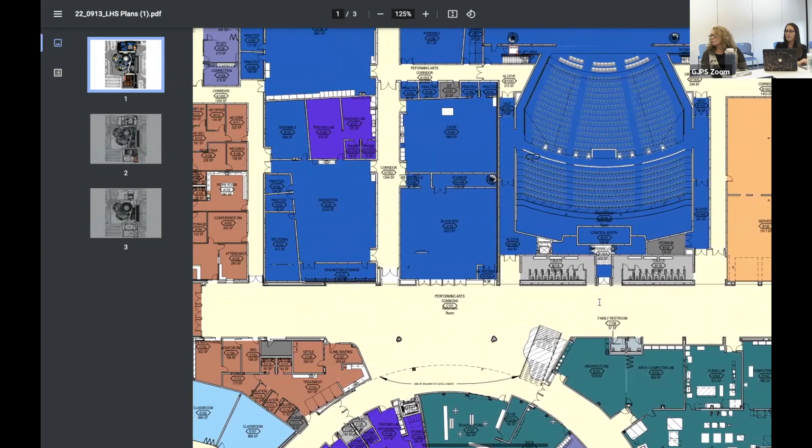As we move down here, this orange space is our main kitchen prep area with servery for meals. As we move farther south, this is the North Commons, which is also going to be one of the main pathways out to the stadium—so that will be a direct pathway out to the stadium for stadium events.

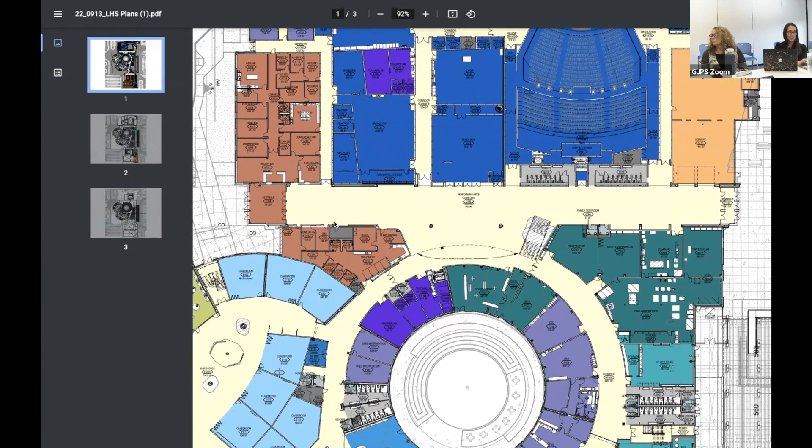This section here is where we have a nicer, much larger clinic area, as well as security offices for SROs and our camera area. So that will be a nice added feature for us.

Moving into the academic prides, I'll start over here. We have 3 floors, and the academic prides are essentially stacked, so what I explain for floor 1 is duplicated on floors 2 and 3, with the exception of a few spaces I'll point out.

You'll notice here in this North Pride, the green signals science classrooms, and the lighter blue are our gen ed or regular ed classroom spaces. We previously had a classroom here where my cursor is, on the back side.

This classroom here has been added - it's one of those third floor classrooms that we brought down and put into each pride. So we essentially have an extra classroom here and an extra one in the south pride, and those are duplicated as well on floors 2 and 3.

Let me go down here - same format, general ed classrooms, science classrooms. This blue color here is our media center.

One of the things we originally had in our plan was a 2-level media center. Right now, on the second floor, the media center has been shelled out space, so that's space we'll have to develop at a later time as needed.

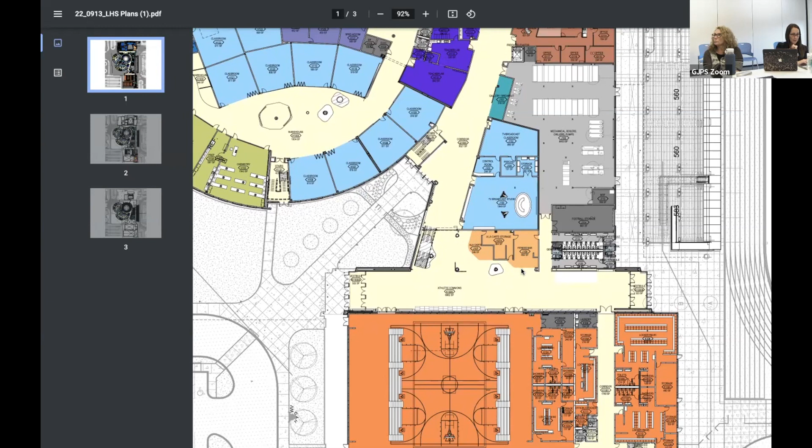And then moving farther down into the athletics wing, we have our competition gym, which we'll seat 2,000 at this point. And then we have our various locker rooms - PE locker rooms and locker rooms for various athletic teams.

This is our new CTE athletic training program, a very nice feature since they'll be able to be right by the training room, which is great for their application.

And then this would be our field house area with another locker room right down here, and some men's and women's PE lockers here.

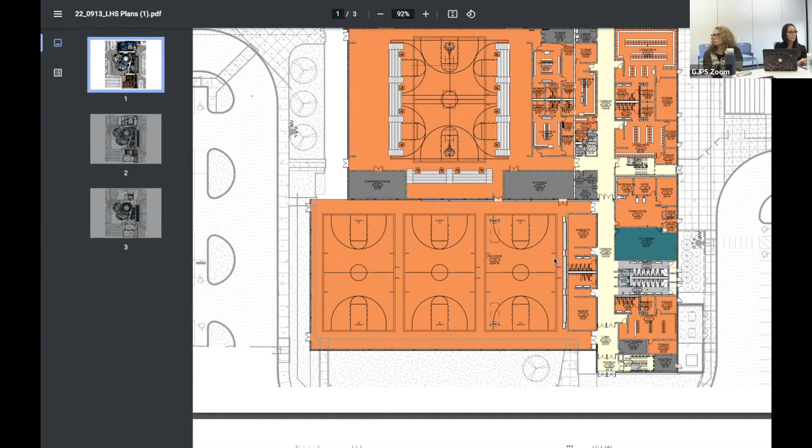How about the integration of the career tech into real world appropriate spaces? Yeah, absolutely. So we went up to the second floor - if you recall, the north end was the performing arts wing.

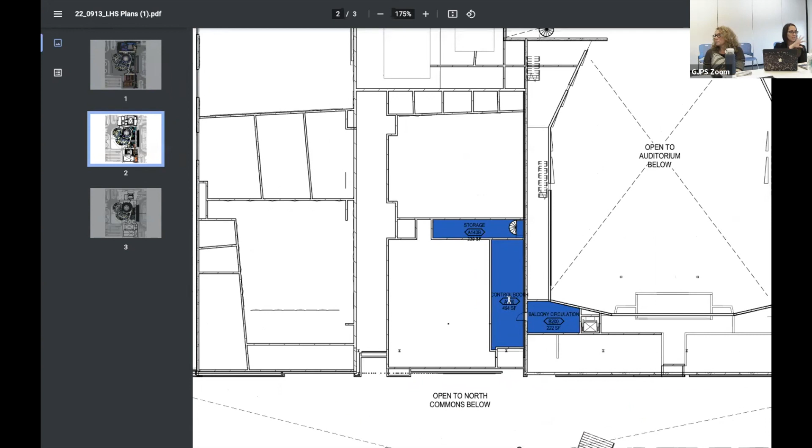So you can see just a couple spaces here - these are the second level control booth and balcony circulation and such for the Black Box Theater, and then into the auditorium.

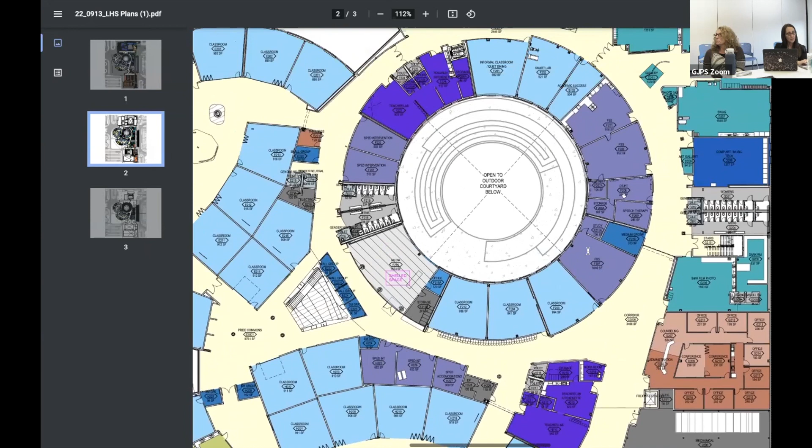As we move south, the prides look just the same. You can see this space here—this is that shelled out media center space that we talked about. We have some classrooms around the courtyard here, plus additional special education programming, which this is slated for our FSS program, academic success, smart lab, the quiet dining space for kids who prefer a quieter location to eat, another teacher lab, as well as the teacher lab down here.

And then on the second floor, this is where more of our art spaces are. So our community art, printmaking, we have a screen printing lab for them, swag. The art team was very helpful and descriptive about the spaces and how they needed to work together, so I applaud DLR for working a million puzzles to make this work out. This space here, I'll point out, is actually a shared space—it'll serve for our music tech and our computer art classes. And then this is the last of the art classrooms, with black and white film photo.

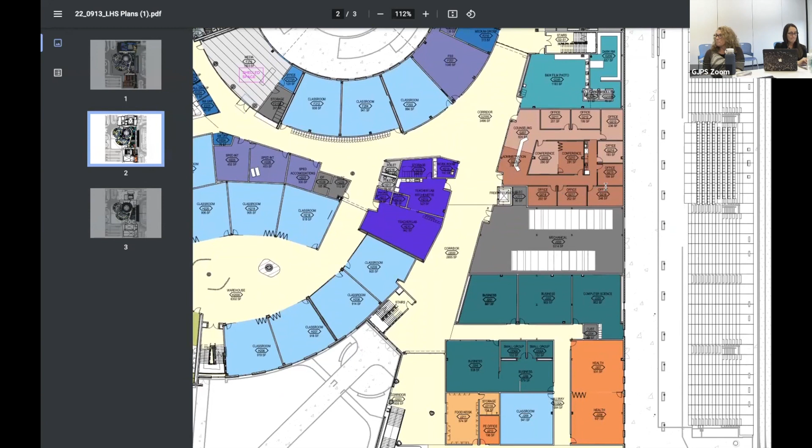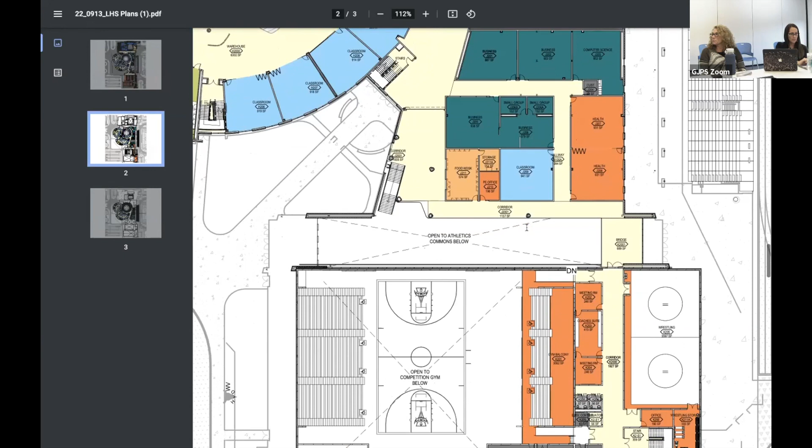Another admin counseling suite, and then farther down here on the second floor, we have our health classrooms, computer science and business classrooms. This is the third distributed dining kiosk—right now we're talking probably a sub shop or something of that sort—on the second floor, and then one additional classroom. Down in the athletic wing, we have our wrestling gym, our coaches suite here, and then the weight room here. And then over here on this side, we have meeting room space and a smaller coaches suite as well.

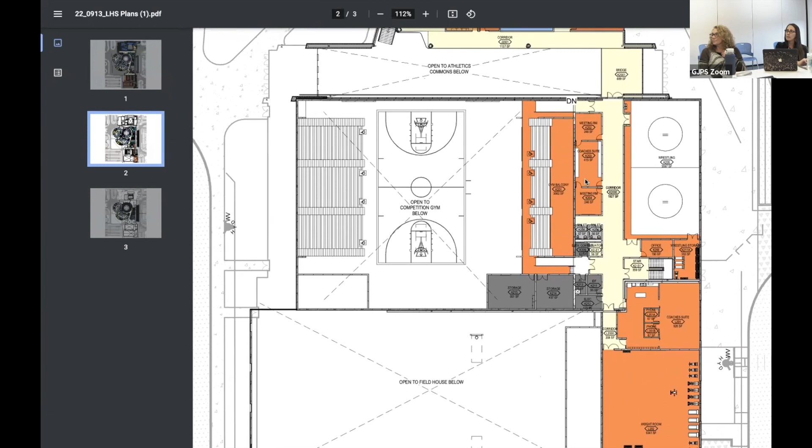And then finally, the third floor—nothing there at that north end. You see the prides looking the same, North Pride, South Pride, and then this is that shelled out space that we talked about. Some classrooms had been moved down and worked into, like I showed, the back side of those prides. And then we have this shelled out space for future growth as enrollment shows it's needed.

Our teacher labs are here and here, so just a little bit of a shift on that teacher lab. And then here we have some special education programming for structured support and our BSS classrooms, as well as down here our FCS, Family Consumer Science classrooms. And one additional shell space here.

Where are the other CTE classrooms?

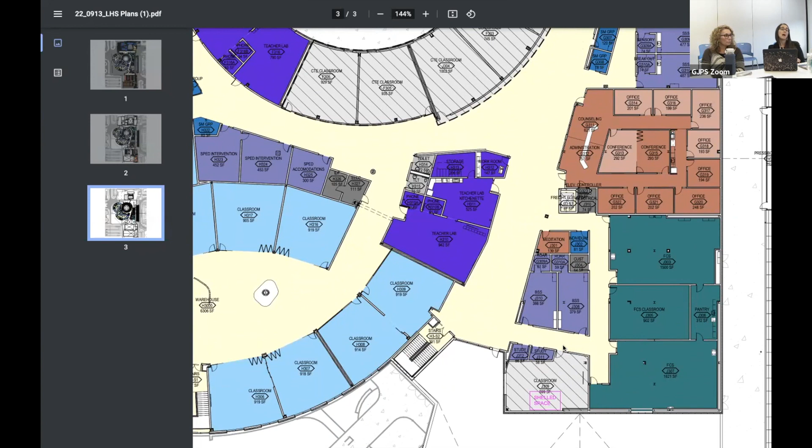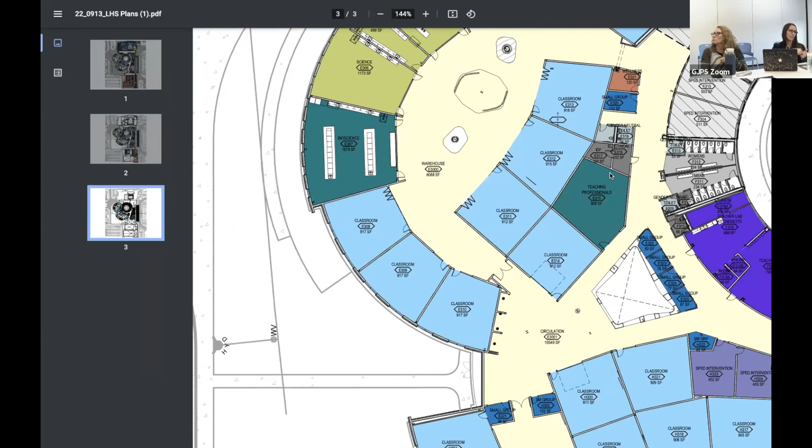So let me show you. We have right here—sorry about that—this is the bioscience classroom, linked right next to these science rooms on the third floor. And then this is the teaching professionals. And then architecture was down on the first floor, right by that, so they're integrated into the rest of the building.

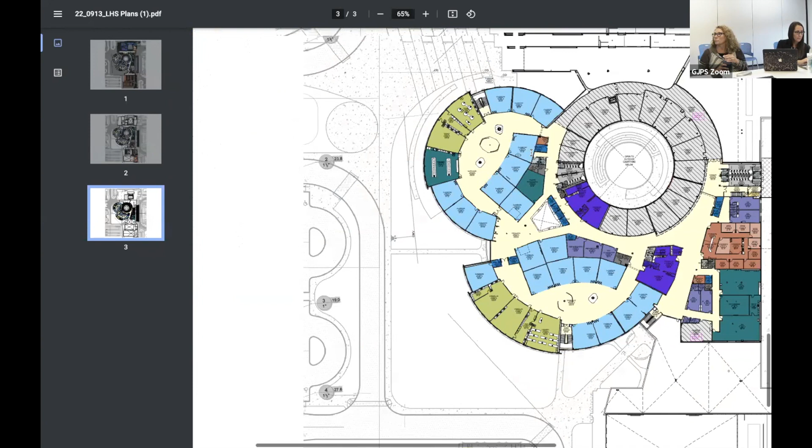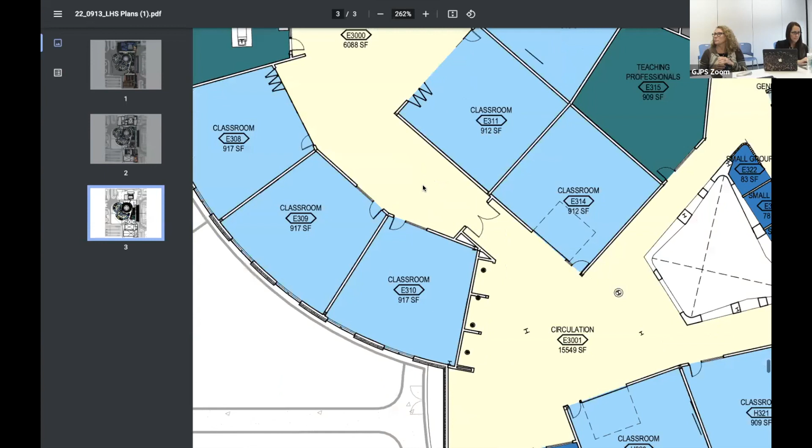Will you also point out the stairwells to go out in those circles? Because I had somebody who was trying to look at it, on the sides, like right here—it's like, oh my gosh, there's only doors at either end, right? But they're really not. There's exit-only ones—we've got some stairs here, and we have some stairs to go down here. This is the third floor, but it takes you down to the first floor.

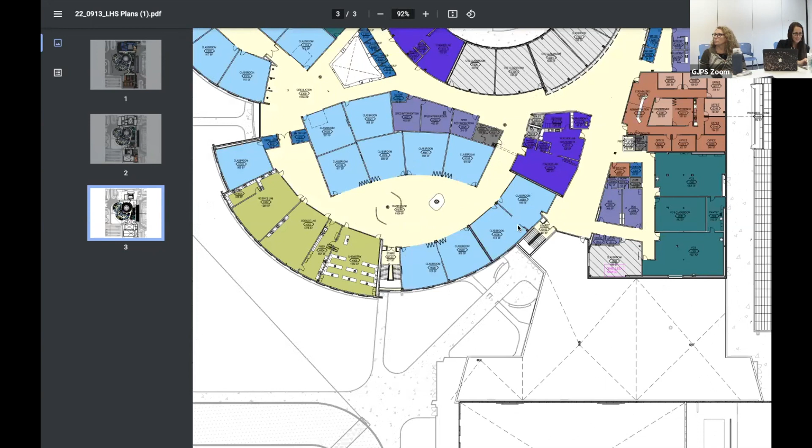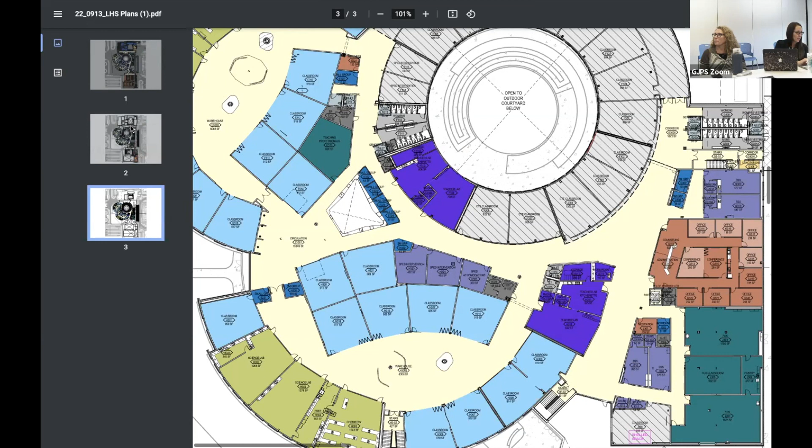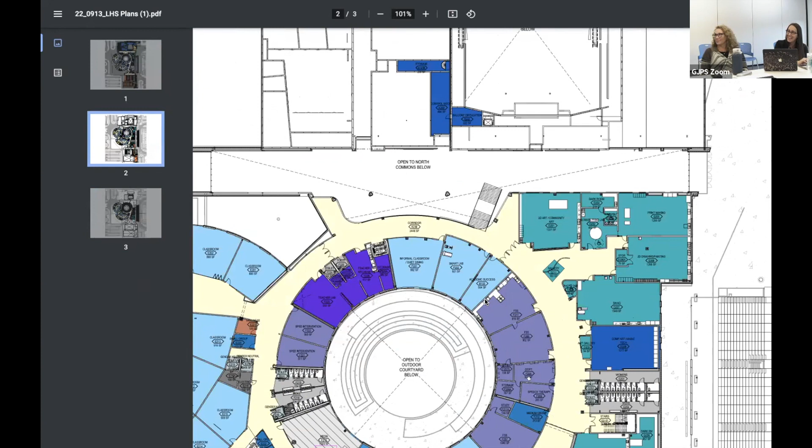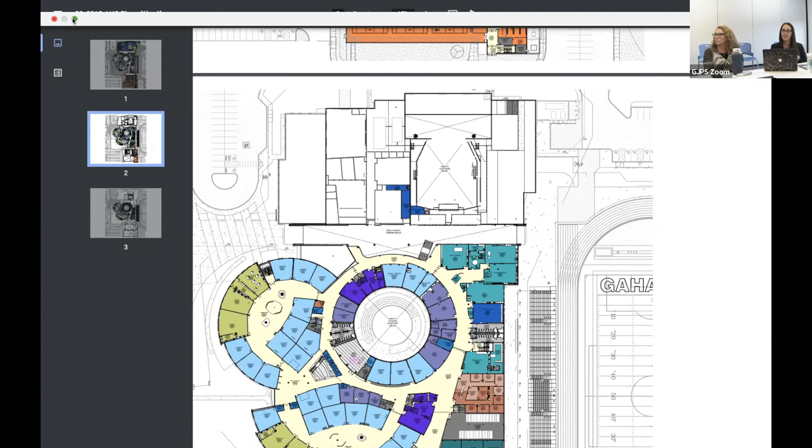So definitely will be exciting when we're able to show the fly-through and get into the spaces. They're also certainly working on interior design elements. We've started having some conversations about getting back together with user groups as we start to talk through furniture needs and some of those interior spaces a little more in depth. But we're really excited about it.